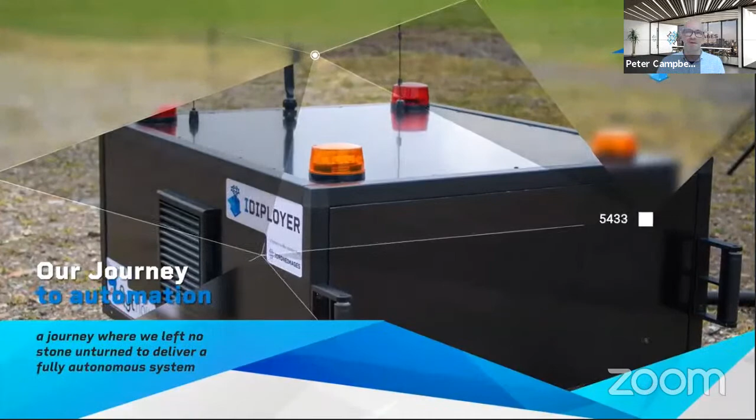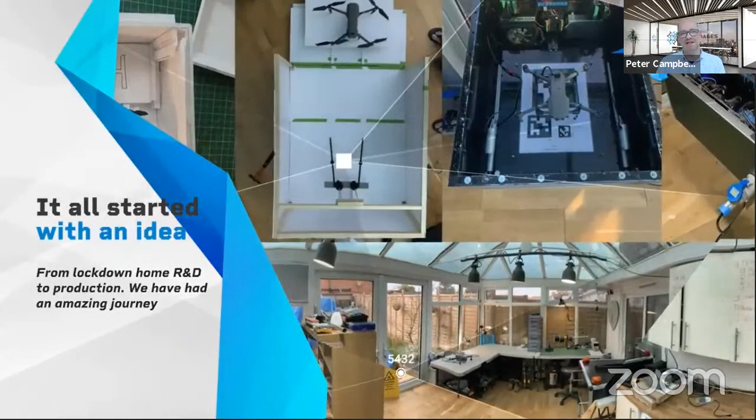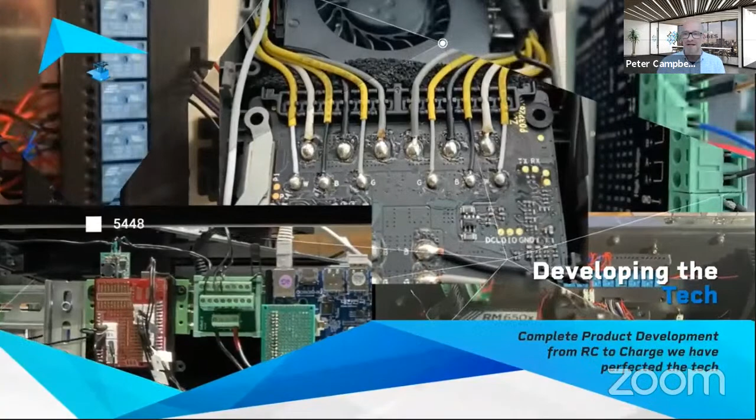Yeah, so these slides are just going to show you a bit about our journey. It all began 18 months ago in our conservatory, where myself and my partners looked at all the systems that are already out there. We started off with a very small scale 3D model, cardboard created, moving on to a metal structure, and then testing all the electronics that we could possibly test to get it to the finished product. You can see from these images there's so much complexity involved, and without engineering experience, we had to learn everything as we went along, including the coding of the systems. So our mission was to create a system, have the right software, and create the right support for you to integrate these into your business. And that journey has been happening since March 2020, where it all began.

We've had this mission of making things simpler, better, and cheaper, and everything we do is about you as the end user being able to have an affordable solution. Taking us through to May, we were tearing down the product to really understand and get to the nitty-gritty of what we can do to make it a simple process for you. We built full-scale models, we built smaller models, we took it outside for testing. And when we met up with FlytBase, knitting that connection together with the software brought us to the end product that we have today that is affordable. You're going to find out more about how affordable it is later on in the program.

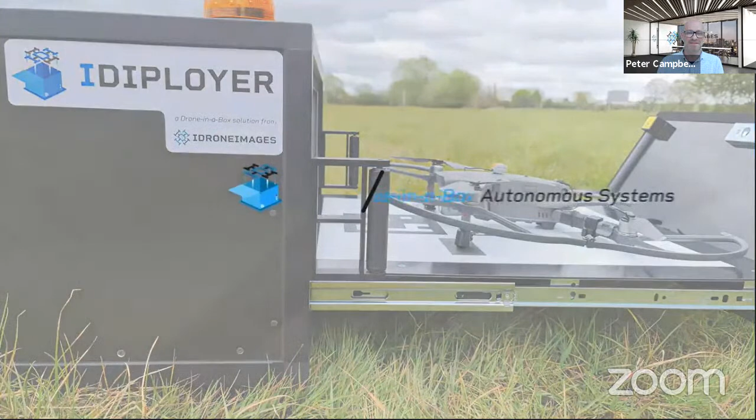Thank you, Peter, for sharing the journey with us. Simplicity is the prerequisite to reliability - this quote from Dijkstra has become common knowledge, both in software and hardware engineering. Yet we often come across systems that are way too complex or over-engineered. So Peter, when I look back at our previous conversations, you always highlighted the importance of why the box needs to be simple - no complex robotics, such as centering bars or movable arms. How is it possible to make a complex automation technology so simple?

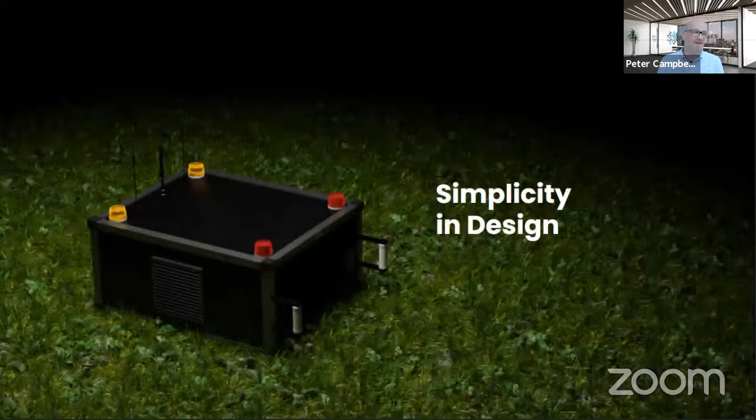It's a really good quote, and throughout this whole process from day one we live and breathe simplicity. If it is not simple, and if it's not better and not cheaper for our customers, we just don't do it. When we began our research into the industry, there were some really impressive robotics and really impressive systems - large boxes opening up, almost like a big show. But we just wanted to tear that down and simplify it. We asked ourselves, how can we get the same result, taking all of that away? We've done that with some simple movements within our box, and with developing the software with you guys to get that precision landing nailed down. We've not done this blindly - we're speaking to and keeping in touch with experts along the way within the industry and the engineering industry, just to touch base that what we were doing is the right thing, and it absolutely is. We're going to present that solution to you today.

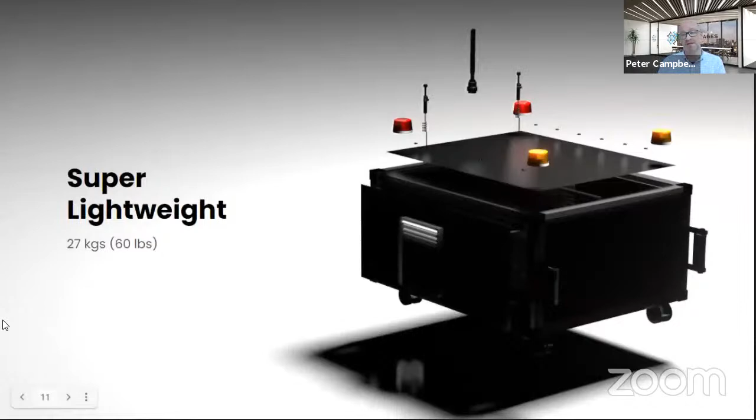Thank you, Peter. That is a perfect example of how simple design thinking can lead to an elegant product. So Peter, this would essentially mean that the box would weigh significantly less than most of the complex drone-in-a-box solutions currently available in the market. Is that correct? Yes, absolutely. The box itself weighs 27 kilograms, so much lighter than what's out there at the moment. How we've managed to do that is we've built a simple frame structure, and we've then included aluminium composite framing for the box. Again, this is a simple approach for us - it's simple to build, it's simple to scale, and it just allows us to adjust the dimensions of the system as our customers request new drones and new charging methods in the future.

So yes, it's lightweight, but very strong and adjustable for the future. But like you mentioned, 27 kilograms is really lightweight - would it be durable as well? We all know that the box is made in the UK - can it also take the heavy rains? Yeah, we've definitely experienced that recently. We built it with IP66 rating in mind. Now we've completed all of the robust testing and we've built it to that standard. And I can say the same for the CE testing and the electronics testing - every component we've introduced has been tested.

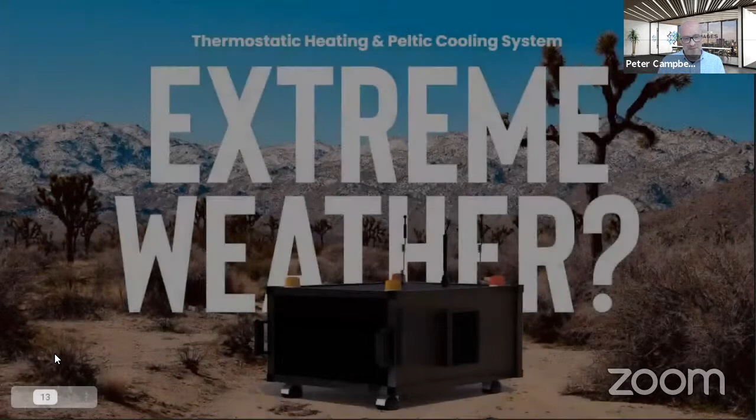Getting our full package tested over COVID-19 is a huge challenge, but the system's in the queue and it's due to be tested over the next few weeks. We're confident, with our expertise and industry experts that have advised us along the way, that this system is high IP rating and will be CE certified. That sounds great, but what about extremely hot and cold climates - how do you regulate the internal temperatures? Sure, so I'm in the UK, we don't experience really cold or really hot climates, so we've insulated the box - it comes as standard insulated. We then have add-ons with our system, so you can add extreme weather packages where we have heaters and Peltier coolers built into our systems. They're all integratable as and when the customers or clients request them throughout the buying process.

This would definitely help buyers who are planning to deploy the system in extreme environments. Going back to the lightweight design, how would you tackle theft? The box is so light that anybody would be able to simply pick it up and run away with it.

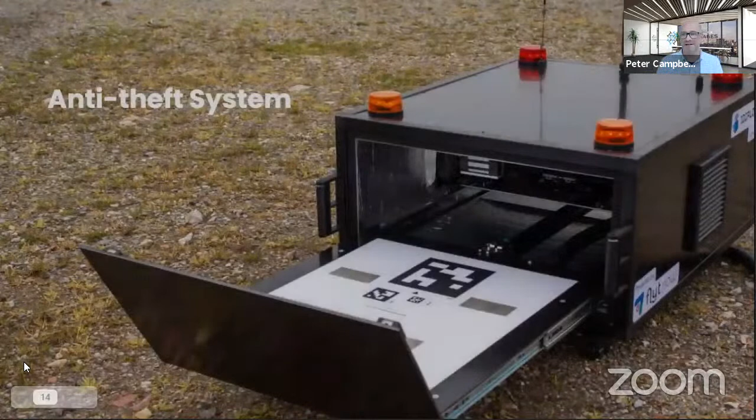Yes, absolutely. When we were testing the system and we took it to a construction client, that was one of their key questions. We're using this system as security. What if someone takes the system? So we looked at that in detail, how we could secure the unit.

On the underside of our box, we've got various bolting connections, so they can be securely bolted to the ground, to a roof, or to a vehicle. So these security and safety measures are all there. But as we go along and work with different clients around the world, if there are better solutions, we can adapt them into our systems.

In terms of the box itself, the drawer mechanism has electromagnets for locking, which also aids our positioning. But we also have latches that lock the drawer, so if there's a power cut or no power to the box, it will remain locked.

As for the rear of the box, where we have all the components so you can do maintenance or adjustments to the systems, we have 2 key locks to the rear of the box. Again, we can secure that to any customer client requests along the way. But yes, I'd like to say it's a secure system. I think that would address the concern of our audience.

Also, Peter, in this image, as we speak, we can see a lot of red, orange lights and antennas on the box. Could you let the audience know what they are for? Yeah, sure. So there's a number of reasons why we went with audio visual features for the box.

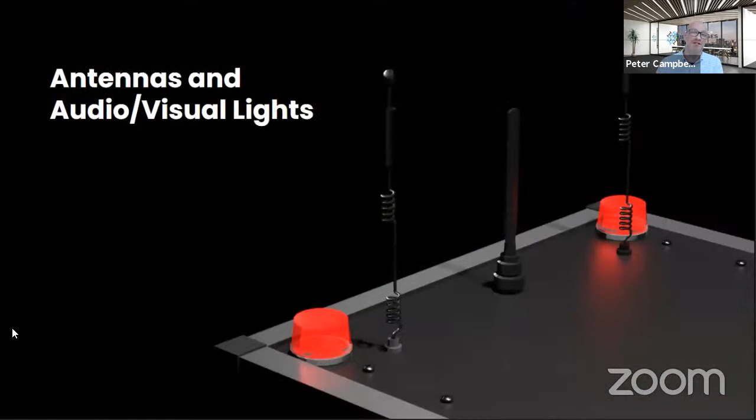Throughout the process, we've stayed really close to the Civil Aviation Authority in the UK and industry leaders and clients who may be the end users for our systems. And what was really clear is that as the drone is taking off and landing, we need to have that visual impact of stand clear, this drone is taking off. This really does heighten the mitigations in your risk assessments when requesting regulations and permissions to use these systems.

We can add different methods of lighting to the system, so all our LEDs are writable. If you would like to change the sequence or change the color of the lighting, we can make that adaptation. In terms of audio, that's an add-on feature we can add onto the system, where it will send out an audio message that the drone is taking off.

Now, towards the back of the box, as you can see in this image, we have a number of antennas. The remote control for the UAV is situated inside the box because we use that to control the flight of the drone. Obviously, with it being contained in a box, you lose a lot of the signal from the RC. So we've extended the antennas out to the outside of the box, and that ensures the flight's always safe because it's getting a great signal.

And the center antenna is for LTE 4G. So we've integrated that LTE and 4G system, so we've got great connectivity with the box. But you can also connect it with Ethernet as well, so it's got various connectivity routes.

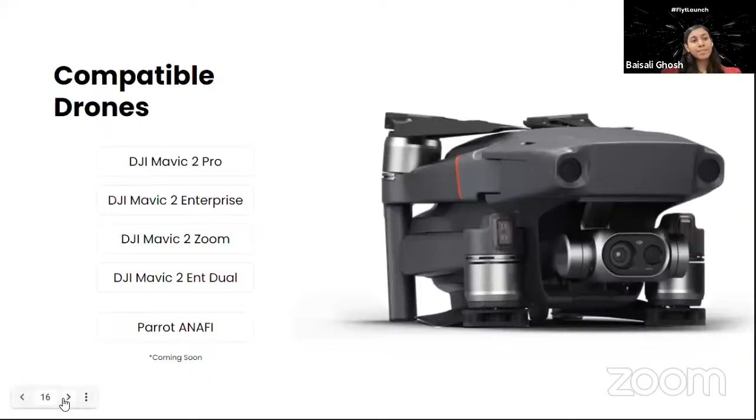Sure. Over 18 months, a really key part of the integration for us was the charging. We wanted to make it as safe as possible, so we investigated lots of different charging methods out there. We wanted to ensure the method is number one, safe, and two, we don't do any modifications to the battery cells itself. So we've designed a contact plate approach.

Coupled with the software precision landing, we can accurately place the drone on the landing platform. When the drawer closes, the drone is positioned accurately onto these contact pins. We have 2 contacts at the rear of the drone and 2 at the front, matching the landing platform. The 2 at the rear ensure we get a negative and positive charge to the battery, and the 2 contacts at the front let us communicate with the battery and the drone to tell it what we need it to do during that process.

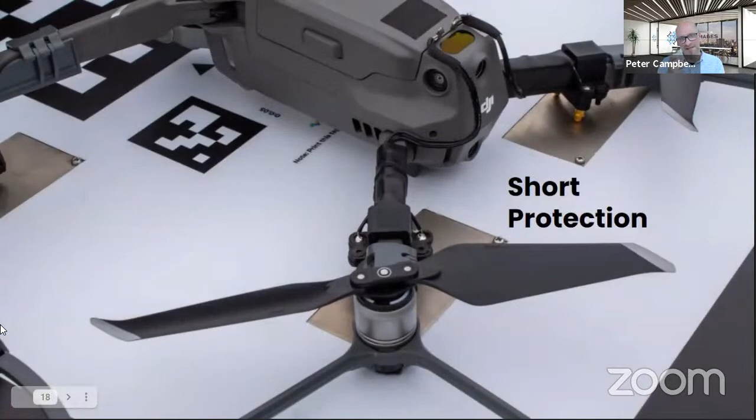You mentioned the contact pins on the drone for battery charging. So what happens if the drone lands on a conductive surface? Yeah, so that was a key part of our testing, particularly when speaking to clients around warehousing. It was really important that should, in the really remote off chance, this drone land on a metal surface or into a puddle or conductive roof, nothing should happen to the batteries, because we've got contacts under the drone's feet.

There is that risk. So what we've done is added short protection into the legs itself. They're just attached, part of the modifications we've made - a really simple device to stop any current going back down to the drone's feet. So there is no risk of conductivity.

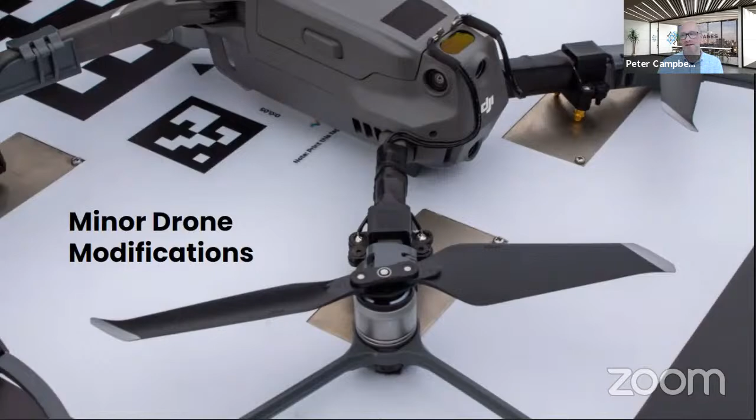Does the charging module require any modifications to the cell of the drone battery? No. A lot of the systems we investigated did modifications to the battery, and we wanted to avoid that because the safety of the flights is absolutely paramount to us, and I'm sure it is to our viewers too. So we don't do any modification to the battery cells, absolutely none. It charges through its normal charging process and normal charger that's integrated into our systems.

The only slight modification we do is to the battery switch, so we can turn it on and off remotely and trigger the charge on and off. That's the only modification we've done. There's absolutely none to the charging cells.

But would this kit, which is for minor drone modifications, increase the weight of the drone significantly? No, they're all very lightweight - under 2 grams is the total modification we've done to the UAV, and they're all very simple modifications. They can be done by anybody, quite simple to do. We've created them so they can just be added and taken away or replaced if they break. All right, that sounds like a negligible amount.

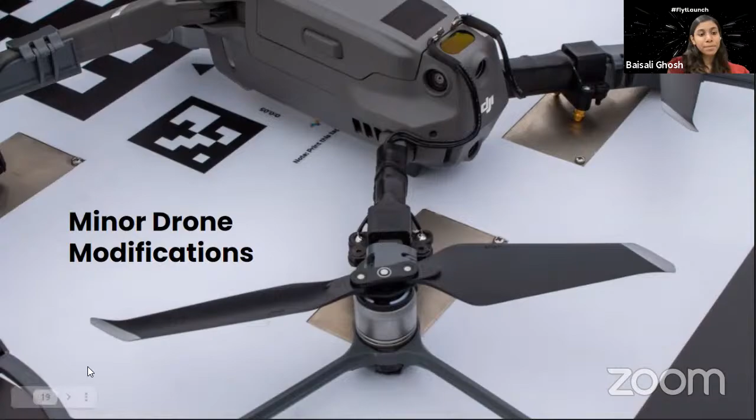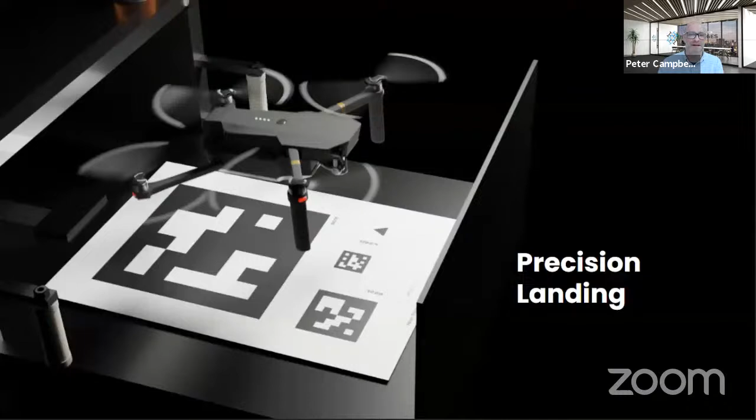We now move on to talk about the landing. So how do you ensure the drone lands on the box every time? We've integrated FlytNow's software precision landing module, designed for the Mavic 2 drone. It's very reliable and centimeter accurate. We've done hundreds of flight test landings and achieved accurate landing on every single one. Where we've had any deviation from that accuracy, it's due to a freak gust of wind or something going wrong. But we've got roller bars on the outside of our box, and with our drawer closing, it positions back to its center position. So there is absolutely minimal risk of it not landing in that accurate position. It's been a fantastic integration, one we've worked really closely with FlytBase to nail down that true accuracy.

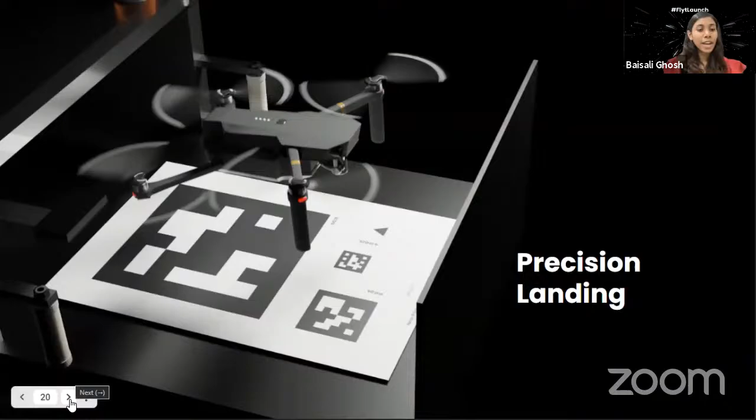That's brilliant, Peter. To help the audience understand the precision landing module better, I'd like to turn the cameras to Achal. So Achal, could you tell the audience how the precision landing works? We do have a video if you would want to play and speak to the audience. Sure. So we'll play the video, but again, the whole importance here is the system would be of no use, or it would be a deal breaker, if the drone does not land every time on the docking station.

So the precision landing provided by FlytNow ensures that the drone is landing with the correct yaw position every time, with centimeter level accuracy on the docking station. And it has been built with various fail safes.

So what happens if we lose the tag? What happens if there's a gust of wind? A lot of fail safes have been built in where it can recover and precisely land, or in case of failure, go and land on an emergency location. So we'll have a quick video here to show you what it looks like and how it lands.

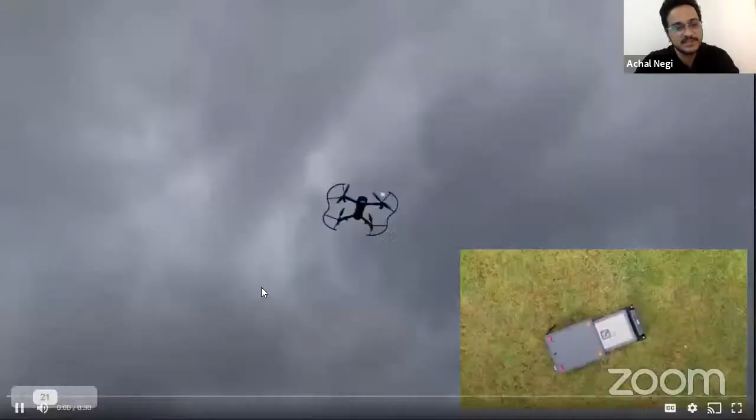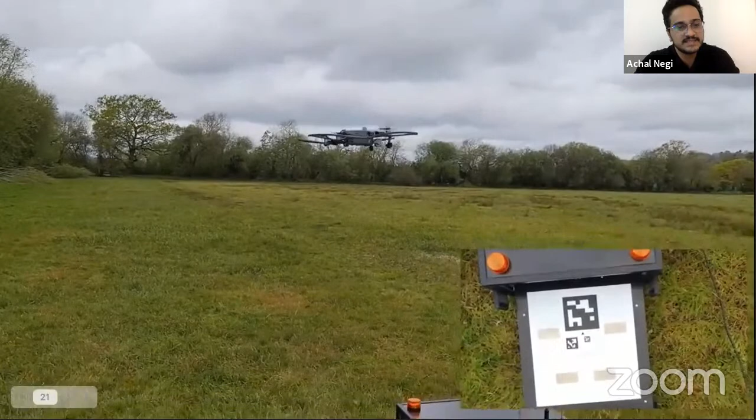So if you can just play the video. In this video, you see the drone has reached the home spot and it was in a different yaw position. So it's correcting the yaw and looking at the ground markers to precisely land on the docking station. We'll obviously look at more demo videos along the complete event, but this shows how it can quickly align and precisely land the drone into the box.

And you can see this is the reason the complete compact design of the docking station is made possible, because it could land with that centimeter level accuracy. So that's about the precision landing.

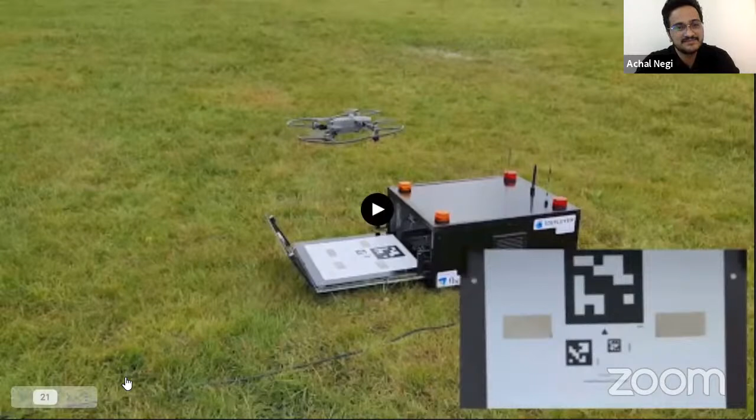Yeah, so we have a number of add-ons for our systems. We wanted to provide a really affordable system. And when we're speaking to clients, there's some things that they just didn't need, and some things customers may need in the future. So there's 4 really key add-ons that we've made: extreme temperature controlling, adding a weather station for increased risk and safety, and bespoke customer branding.

So we offer standard branding, your own branding onto the box already. A small logo either side, but we can do complete wrapping of the box to your own branding if you send us that information.

And also external CCTV. Some civil aviation authorities around the world have different policies around how you view semi-autonomous systems. Having external CCTV was one key thing that some clients requested. So we have an on-pole dome camera that can view the environment around the box and view the takeoff and landing. So those are just 4 of the key features we have.

Thanks again, Peter. These features really put the MP2.1 ahead of the curve. One thing our audience would be curious about, especially since quite a few of them witnessed the launch of Hextronics Global last week, in what way do you think the MP2.1 stands out compared to other docking stations?

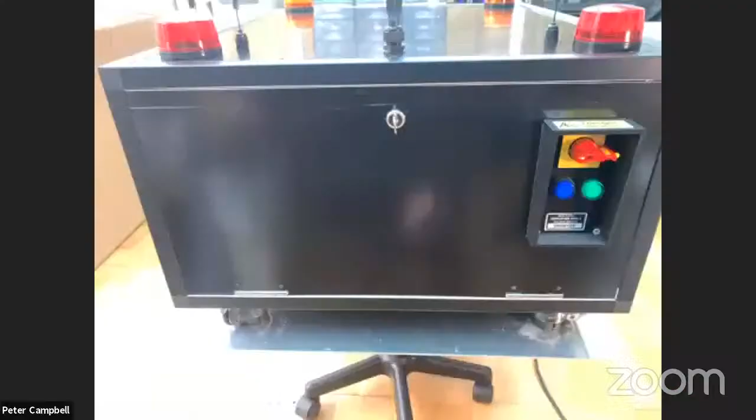We are all very excited to watch. Can you see the box? Yes, we can, Peter.

I just wanted to show you some of the system live, because it's really nice to touch and feel and see the actual system. At the back of the box, we have our power-on system: the isolation switch, power-on for the box mechanics, and a separate charge function isolation. We're not shy to show you what's going on inside—this reflects the complexity and experience that's gone into building this system.

Over in the corner here we have the remote control. What's different with our system compared to others is that you can remotely switch on the remote. Once the box is switched on, you can switch on the remote from anywhere in our dashboard, so there's no need for somebody to physically come back and switch the RC on if the power goes off and on again—we can do that remotely. We kept it all very simple, although it looks complex. We've removed a significant amount of electronics to keep this nice and compact for you.

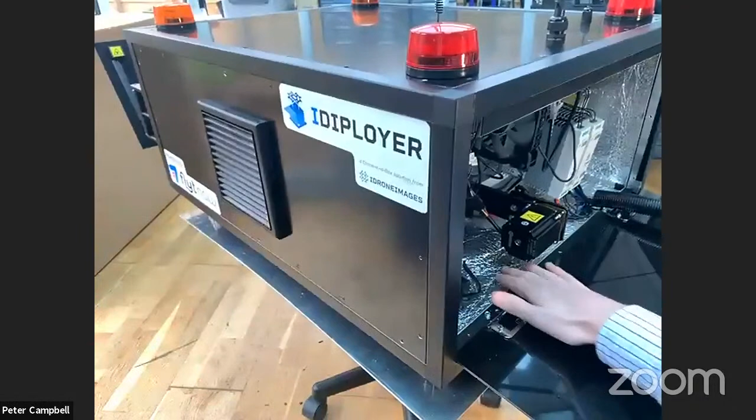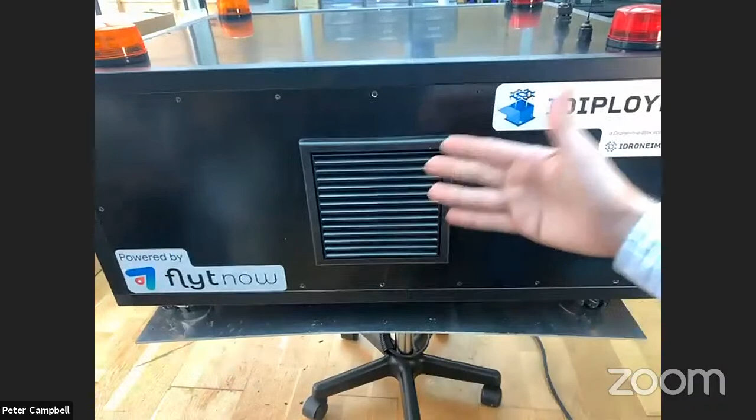We've already experienced the antennas and lights on the system, but you can see inside where we've got the silver lining—this is the insulation for the box. We've installed fans either side, a fan in and fan out, which aids the cooling of the drone. We've moved some of that system to the underside of the box rather than the side, which helps us with the IP rating in the future.

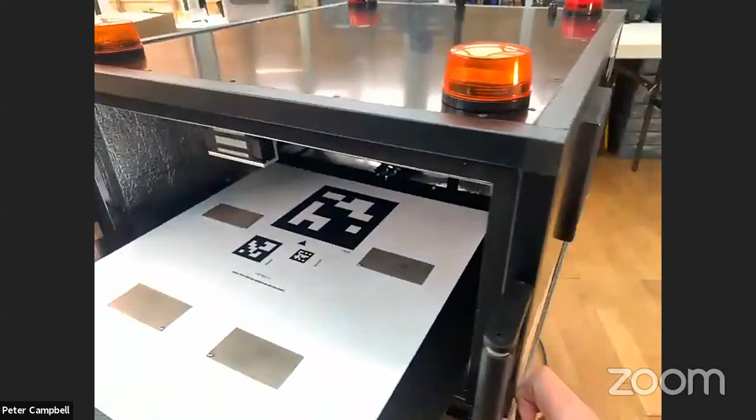Spinning it round, you'll see the inside of our landing process. You'll probably see on the video later that we use simple rollers on the side of the box—they use the prop guards for positioning. So if the drone lands slightly to the left or right, the prop guards hit the rollers and slide it nice and quickly and accurately onto the contact plates. Really simple, and this is what we're talking about with robotics. Six months ago we shared with Nitin our box, and it had lots of complex movements and mechanics moving the drone into position. He challenged us to see how we could remove that and make it even more simple, Peter—and that's what we did. It really does work and it's very effective. So that's a little insight into the box, Vaishali.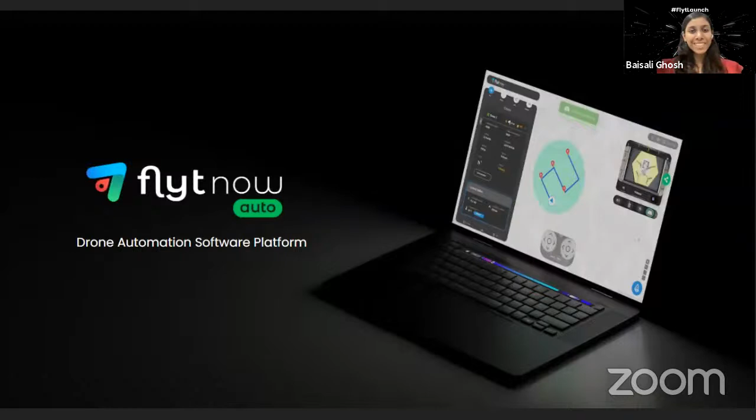This is the bit, as Baisali said, about the software. Drone in the box wouldn't just help automate drones—it could also help you automate your complete business workflows. It could help you completely automate your flows from collecting the data, doing repeatable missions, as well as scaling the complete drone operation, which was very expensive when you had a human in the loop.

All of this requires an advanced software platform which can help you deploy these systems for various use cases, be it security, first response, construction, mining, and the list goes on. This is where FlytNow Auto, a drone automation software platform, has been designed exclusively for scalability as well as keeping safety and reliability in mind.

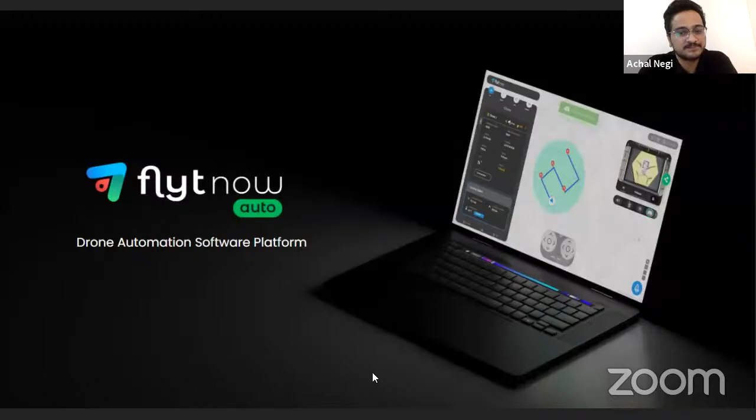All packaged in an easy to use interface where you can plan missions, linear or waypoint missions, or grid missions for various survey and mapping applications. You could schedule those on a calendar, a complete calendar view for scheduling the mission, be it your morning check or afternoon check, and you can schedule it on a repeated basis.

All of this would require your own SOPs, standard operating procedures. So you can create your pre-flight checklist and implement that right there in the dashboard.

As you're flying the drone, you obviously like to capture the data. You are flying the drones to collect aerial data which automatically feeds into your system. That is where FlytNow allows you to capture live video feed in HD quality, both on the cloud and directly on the SD card of the drone, which can be retrieved later into the automated workflow and stored on the cloud for further processing.

So be it you wish to create ortho maps, do 3D modeling, or use AI to detect objects, all of that is now possible.

You can also integrate various sensors and cameras like thermal cameras for night vision. The Mavic 2 Enterprise Dual already comes with that, where you can easily get thermal video feed right on the screen with all the functions you currently have on your mobile apps, on the remote dashboard.

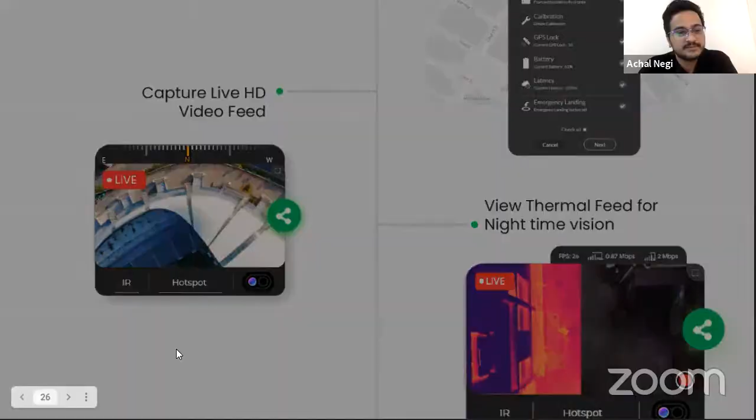Similarly, we have integrated all the payloads possible with the drones, like broadcasting an audio message. This is very critical for security as well as first response applications. The DJI Enterprise Dual, with a loudspeaker, provides you the capability to broadcast a message, and we have integrated that with the FlytNow Auto platform, so you can record your message and broadcast that video feed.

Of course, you can also integrate your spotlight or beacon with the drone. And all of these things can be recorded in an archive, where you can save it on your private cloud on secure storage and retrieve it or see the complete logs.

This is a quick overview of our FlytNow Auto platform, which brings autonomy to these off-the-shelf drones as well as custom drones, and provides an intuitive cloud-based interface to manage a fleet of drones and docking stations.

It also provides integration with third-party services. So if you're looking to integrate with any VMS, or you need airspace data with the UTMs, or you need to integrate with mapping software, all of that is possible. FlytNow will enable you to automate the complete workflow for your data collection, as well as help you conduct repeatable missions with ease using the docking stations.

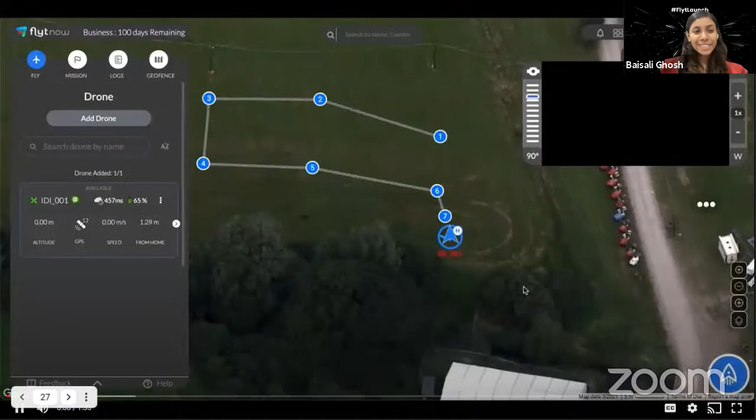Sure, thanks Baisali. What we've shown you is a really quick short video of the mission and what happens during the mission process. So once you've done your pre-flight checklists, as Achal just went through, what happens next?

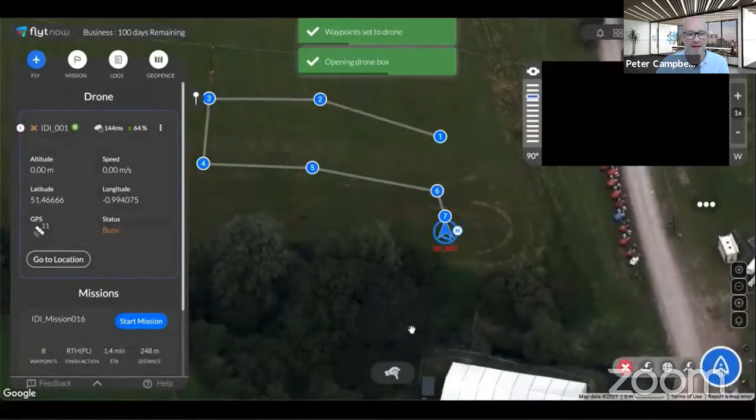Once you've triggered the drone mission, the box will open and it will then begin its flight. So you can see here where the drone has taken off for its mission, and it then goes on its predefined waypoints. You can set one waypoint or multiple waypoints within the mission planner.

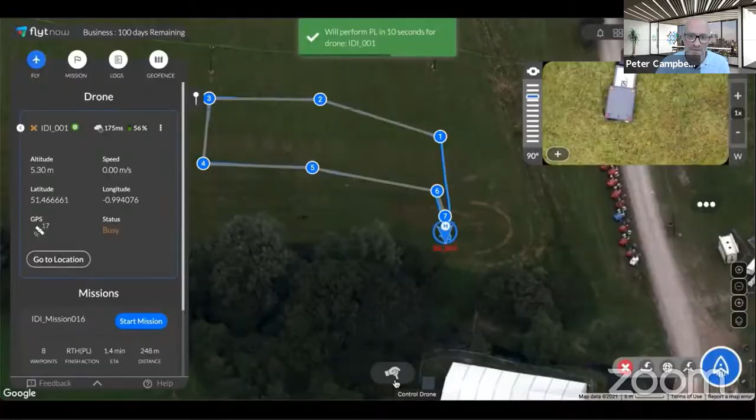You can then set at each waypoint what you would like the drone to do, whether to start recording or take an image. Once it's finished its mission and it's ready to return home, we can automate that whole process. So with a click of a button from the start, it knows what to do at the end. This was a one button click, and it knew what flight path or waypoints to go on.

It then returned through the precision land module. You can see here this was a really windy day, gusting at 30 miles an hour. We were slightly behind a tree line, but it coped very well, even with the prop guards on.

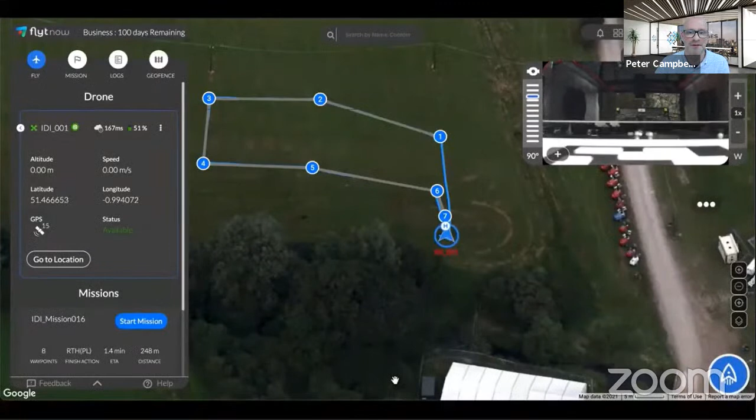It wasn't quite as central as a precision land because of that gusting wind, but this is a really good example where you can see the rollers nudge the drone back to the left into the correct position before closing and starting its charge.

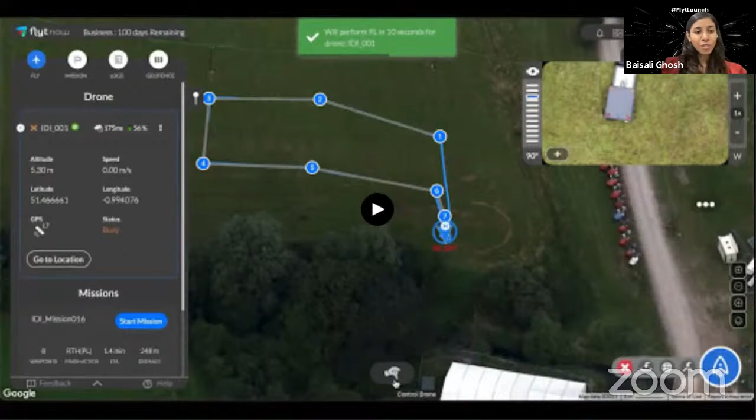Peter, could you tell us what all are the contents of the IDIPLOYER MP2.1 automation starter kit you're offering our attendees today? We want to make this simple for clients to integrate into their business, and that's why we've come up with this starter kit: the docking station. What you've seen today and what we've shown you live includes a 3-month subscription to FlytNow Auto, 3 months iDrone Images remote support with us, and 1-year warranty. Most of all, we include the DJI Mavic 2 Pro with the system. So our price includes the complete solution for you to go away and start to integrate the system. Really very simple for you.

This would be a great package for anyone who wants to get started with autonomous operations, especially with the inclusion of the brand new DJI Mavic 2 series drone. So Peter, would you like to disclose the pricing, or do you want our audience to give it a quick guess? Yeah, let's have a quick guess, see what they think first.

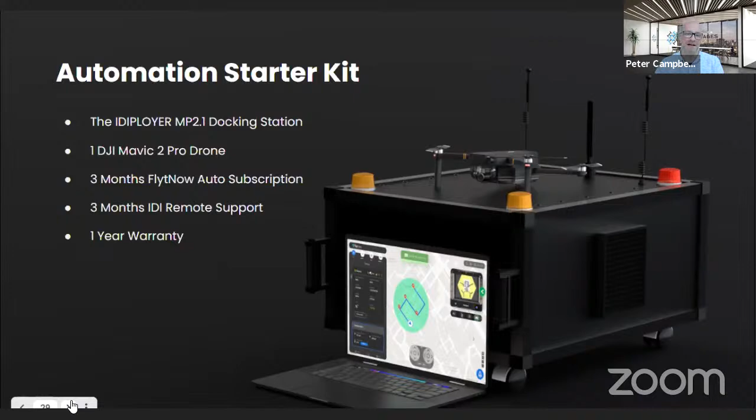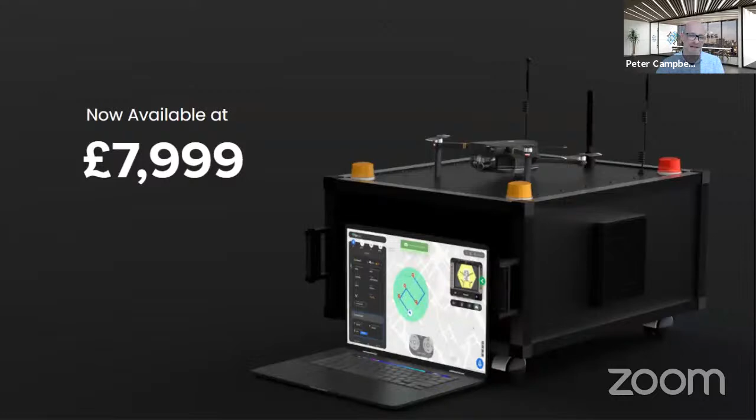Yeah, absolutely. So what I've just described - the docking station, the 3 months FlytNow subscription with the drone, the 3 months remote support from us, and the 1 year warranty - we're retailing that at £7,999, just short of £8,000, which is a fantastic price in comparison to the industry. A lot of boxes out there don't include the UAV, so we're including that into our package to make sure you've got the full solution. Most people are in that ballpark.

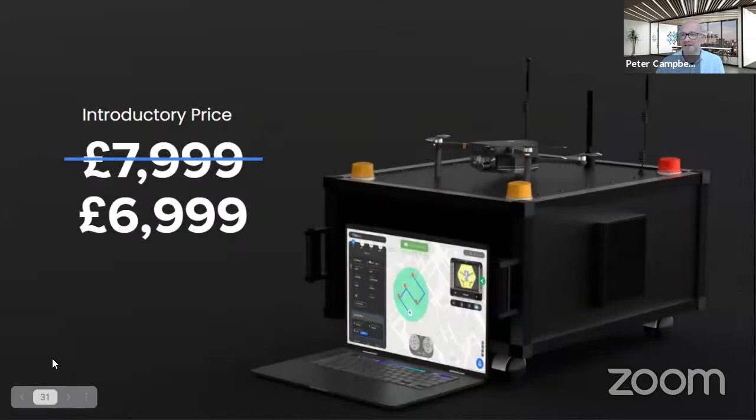That is definitely path-breaking, Peter. But I know from the video message you shared on social media just before the launch event, you mentioned the system would be highly affordable for our fellow attendees. Do you have anything more to reveal? Yeah, the introductory price we're giving our product, we're going to take £1,000 off that. So £6,999 is our introductory price that we're going to be sending out to the market on social media, and that's what we'll be advertising the box for. It's a really great price, and throughout this process we wanted to make it affordable, and we feel we've achieved that. Just £7,000 - and I'll repeat it once again - this includes the DJI Mavic 2 and everything else: the software, the hardware, the support, the warranty.

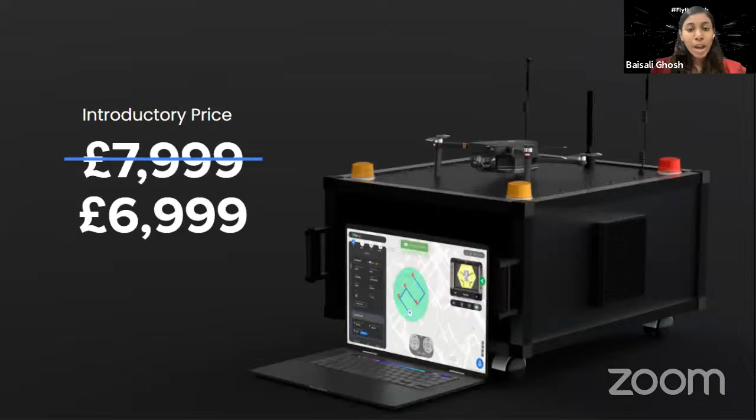This is unbelievable, Peter. With this level of affordability, you're basically giving enterprises and drone solution providers the freedom to implement the technology without having to spend a fortune. As you must be aware, I've constantly promoted an early bird discount for our attendees today. What is the best that you could offer?

Always driving a hard bargain, Baisali. Always - we want to get this system out there, and we want you to be able to integrate it at an affordable cost. We want to give you no reason to walk away today without buying one, because we know how important it is for the industry to get automation out there and help you integrate the systems. So yeah, we can do a bit more.

I was just expecting a £1,000 discount, Peter. But then seriously, this is almost half the price. No, it is half price, Baisali. It is half price. We've gone right down to half price.

What we didn't want to do is come on here and say look, we're all half price, look at our great price. It's not about that. We want to get these systems out there, and we want you to test them. We know that you're going to know and love them, and when you do, you'll talk about it. Eventually we want the standard price to be £3,999. We want it to be available to everybody at an affordable price.

So this is your opportunity to order at a great price. I think there's nothing out there that's going to match it. Thank you for correcting me, Peter. I couldn't believe it, yes it is. You are right, this is indeed half the price. This is a great deal for our audience today. Thank you so much again.

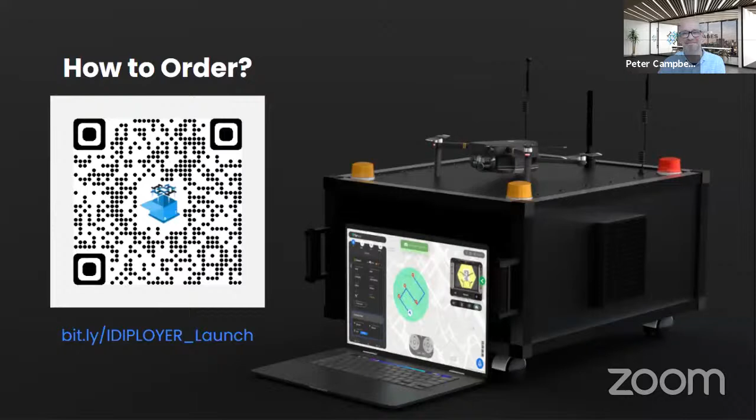Yes, thank you again, Peter. What about the lead time? When can buyers get their hands on the box? Yeah, so the first 10 boxes, if ordered before Monday, we've got 21 days lead time before we begin shipping. So shipping will begin on a first come, first served basis. Once you order, we'll contact you to fully understand the bespoke adjustments you want to make to the box, or different requests you have. We'll then start shipping out the systems. But if you have any real concerns, like you don't need the drone, or don't necessarily need the lights on top, just order the system at this price, and then we can talk about those adjustments after.

Thank you again, Peter, I think this is incredible. Less than a month's time - over all the customer interactions we've had in the past, and even the poll we recently saw, lead time was one of the concerns that most of our attendees today had, and you definitely addressed that right away. There was one other question we initially missed - you mentioned that the package includes the DJI Mavic 2. Why have you included that in the package? A lot of our audience are drone service providers who would already have a DJI Mavic 2 drone with them, so why was the drone required?

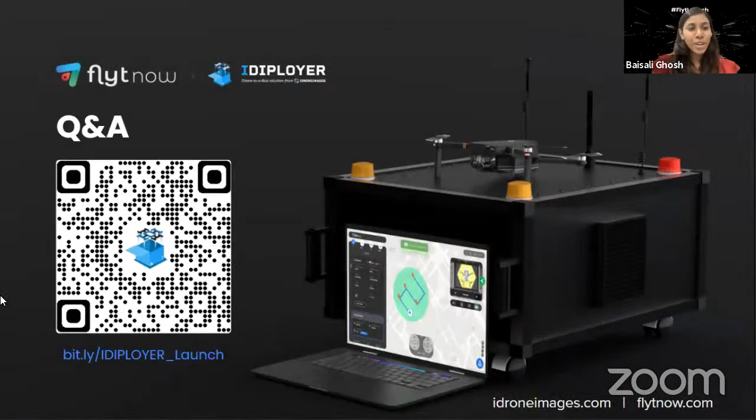We have a lot of questions, I'll quickly start with a few, Peter. With regards to the hardware, let's take those first so people are aware of everything that goes into the IDIPLOYER. The first question: do you need to fly with the prop guards? Is it compulsory? It's not compulsory. It aids the positioning of the drone for precision landing—if it deviates slightly off, it nudges it back into position. It's not a must, but we do recommend it. In all our testing, there wasn't significant resistance to the wind with the prop guards—they're very lightweight and very capable. So it's a choice, but we prefer you use them for safety.

There are a lot of questions around custom drones, which you mentioned people can use. What are the dimensions of the drone that the Nest can handle? I guess that question is probably directed towards the Mavic 2 Dual—can it have the speakers and lights on top? Yes, there's enough height to receive the Mavic 2 Dual; it's in our store to sell. The height is about 27 centimeters from the drawer to the top. Once we start integrating different drones, we can adapt the height and width of the box to suit those dimensions.

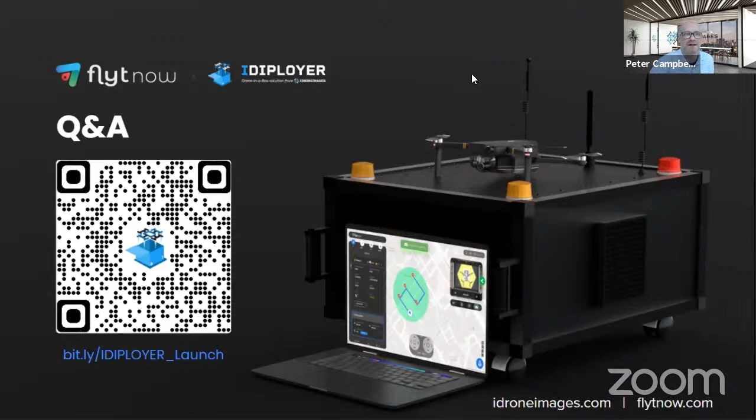As a longer term, we have different contracts available for swapping out systems and updating your system. If we have a new design or new feature, we'll first come to you to offer that support. The contracts vary from client to client, so very bespoke to each client. We're open to different partnerships and contracts with each client. So just reach out to us once you place the order, and we'll tie everything up in terms of contracts and maintenance of the systems.

Thank you so much, Peter. I think we are already up on time and running quite late, so I would like to conclude today's launch event and this whole hour-long journey that we saw.

So this is it. We at FlytBase are definitely humbled to be one of the industry's first to bring to our users two of the most exciting drone-in-a-box systems in the market today. Each system is very well engineered for performance, reliability, and durability, and is set to challenge the conventional notion of DIB systems that are used to being super expensive, bulky, overly complex, and with very long lead times.

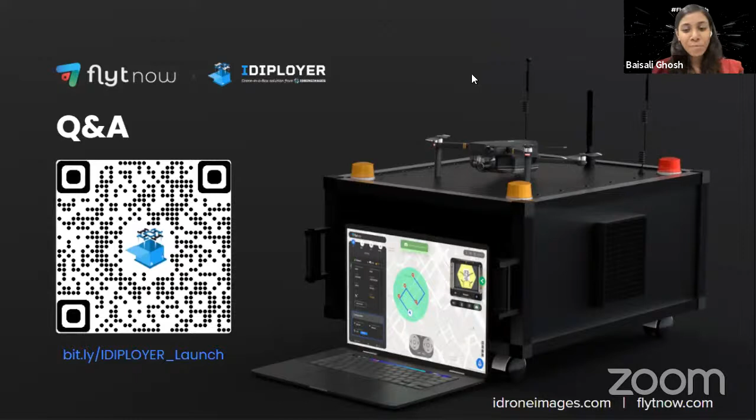So don't wait any further. We need your love and support to continue on this journey. Place your orders before we run out of stock. I would now like to ask Achal and Nitin to share their closing thoughts. But before that, I would take a moment to wish Achal a very happy birthday.

Happy birthday, Ash. Happy birthday, Achal. Thank you, Baishali. Thank you.

So Nitin, moving on to you. Thanks, Baishali. So we started working with Peter and his team almost a year ago, and since then we have closely worked with them on taking the system through so many iterations to ensure that the product is ready for our customers and partners. Now, Peter's focus on simplicity, reliability, and building an affordable product with no compromise on quality makes us believe that this drone nest will serve as a much needed catalyst for the mass adoption of drone-in-a-box systems.

It will enable a number of use cases that were unviable just a few weeks ago. We are super excited and proud to be working with Peter and his team, and we look forward to helping our customers and partners deploy this system in the near future. As always, we are eager to listen to our customers and partners on how best we can help you with your automated deployments. So please stay in touch and continue to send across your valuable feedback. Thank you so much for working with us and for your continued support. Have a great day.

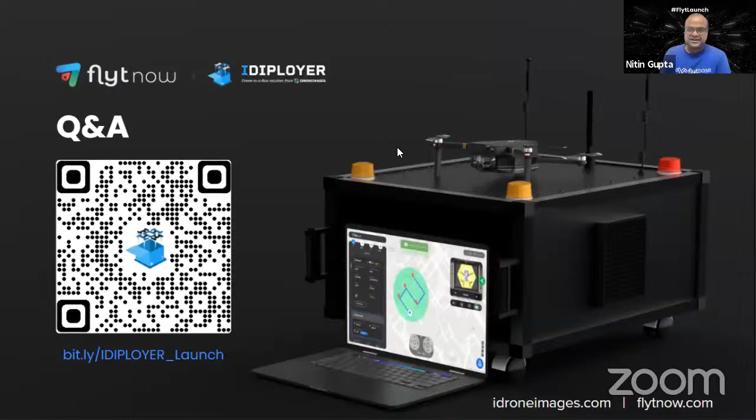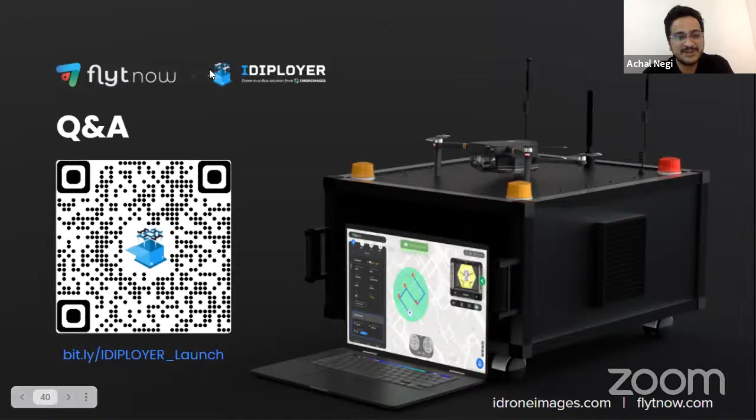Achal, over to you. Do you have any closing thoughts for us? Great, thank you, Baishali. Yes. So I still remember the day when I first spoke to Peter. You were there on the call and we spoke about what Peter is building, and it was really great to see all this in action today. And now it's open for the world where other businesses can quickly adopt that.

So I'd like to first thank everyone who joined this event, and special thanks to Peter and his team who have been closely working with us to create this automated drone-in-a-box solution, at a price that helps scale drone businesses and operations for a lot of businesses. We could see the chat where people are looking to order the complete stock. So we are happy to closely work with you, all our partners and end customers, and help you deploy these systems for various use cases.

Feel free to reach out to us if you have any further questions. I saw there were very few questions that we could answer over there, so feel free to reach out to us. We'll be happy to tell you more about the software, the partner program, and how we could help you. Our coordinates are already there with you. You can go to flytnow.com or idroneimages.com and just put a message and we'd be happy to speak with you. Thank you for your time.

Thank you, Achal. Peter, do you have anything to share? Yeah, we're overwhelmed by the support and the number of people on the webinar today, and so far the orders that have been placed is absolutely fantastic. A few niggling problems with the shipping on the website are now fixed, so if you tried to order and couldn't get back on there, try again because they're going to sell out quickly. So thank you so much, look forward to working with everybody.